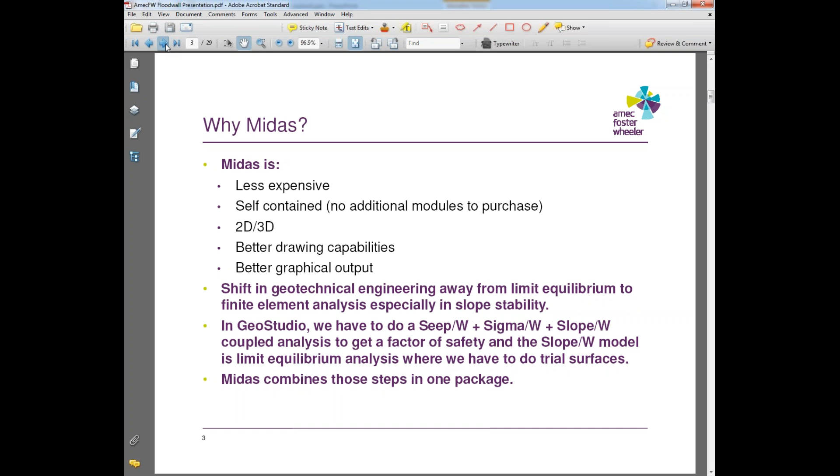This is doable, but it's kind of cumbersome. I just don't see that being the wave of the future when you can do all those steps in MIDAS in one package and in one analysis.

So like I said, we currently have 3 MIDAS network licenses. We are going to be steadily increasing the number of licenses. I'm not sure exactly how fast, the rate at which we increase will depend upon usage. When we have periods where we've got more people wanting to use the licenses than we have licenses, we'll buy some more.

The upshot of this is that at some point we're hoping to get into an enterprise licensing situation with MIDAS, similar to some of the enterprise licensing schemes that we have primarily with Bentley and with Autodesk. So in those situations, we don't actually buy the software, we're basically leasing it.

We use it on a daily basis. When you want a license, you open up the software, it goes out into the network, and if a license is available, you tag that license and start using the software. If a license is not available, it goes to a Bentley server, for example, pulls a license down and lets you seamlessly start using it. So we're hoping to get that way with a lot of other different software.

So that's kind of the background of why we're doing these MIDAS tutorials, these webinars, is that this is the direction that we want to go, and we're going to be steadily working on ways to get there.

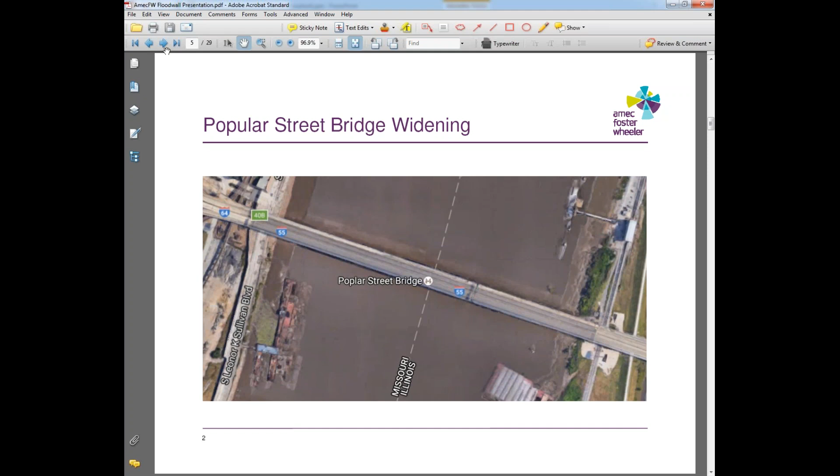But they're going to be moving to the south. They're going to cut out about 20 feet of this existing flood wall, and then they're going to be replacing it. It's hard to see in this particular photo, but right about there is a seam, and the angle of the flood wall changes as you move to the south. I'll show that in some drawings here in a little bit.

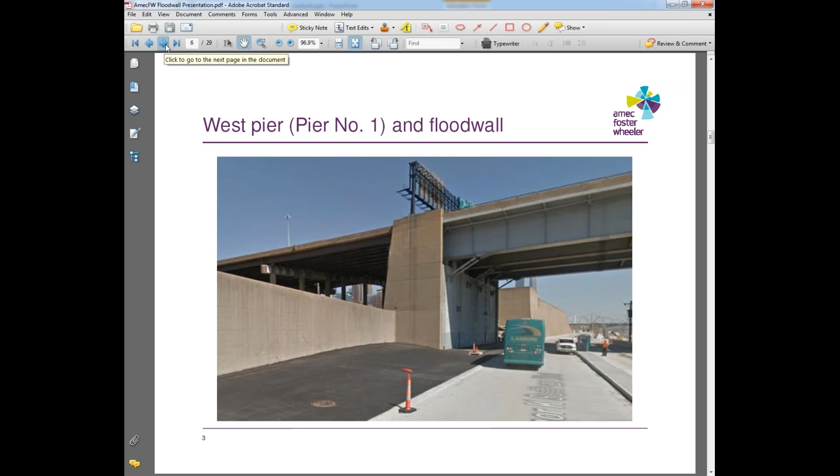Here's another picture of that same area. You can see the doors, and there's some windows there that are below flood stage, obviously. But again, they're going to take out this portion of the wall, recreate it, as they move to the south.

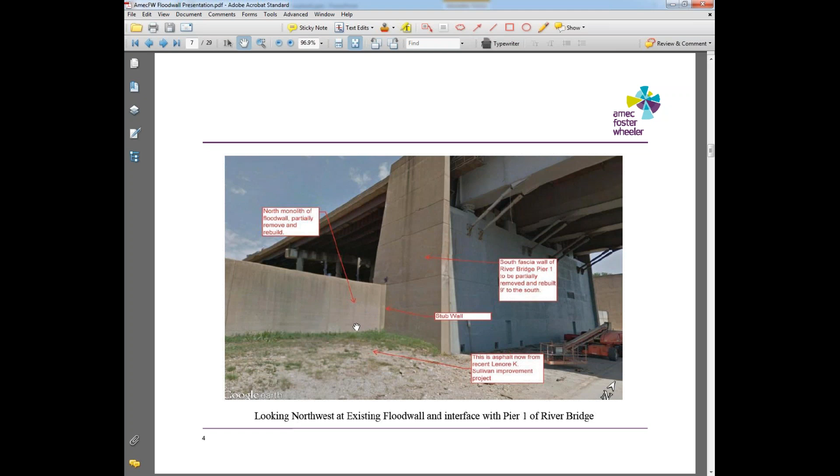Another close-up shot showing the joint between what's called the stub wall and the flood wall.

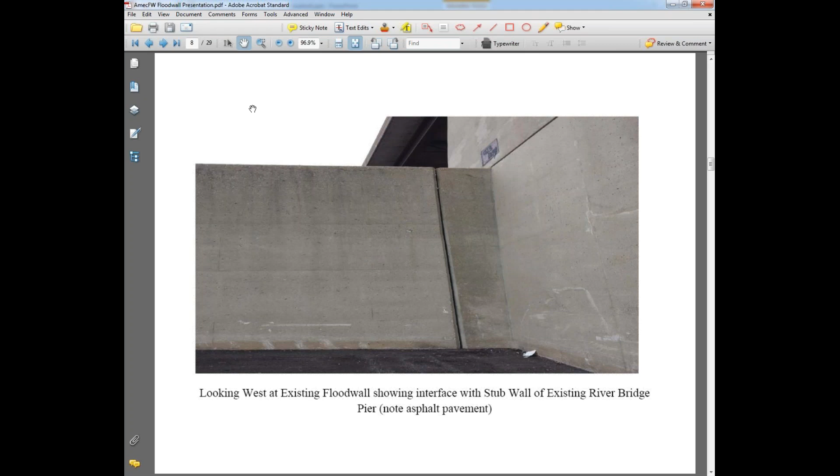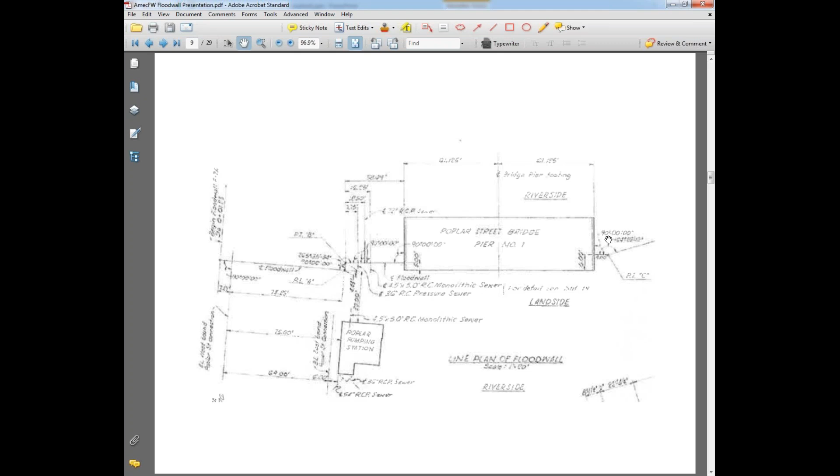Here is an old drawing that shows the layout of the pier and the flood wall. I'm looking at it standing on the back side, on the dry side, looking towards the river. So the river is to the top of the page, the land side is to the bottom. The area that we're interested in is on the right-hand side. The stub wall comes out, you can barely make these numbers out, but it comes out at 90 degrees. Then the angle changes, and the angle between the stub wall and the flood wall is about 64 degrees. So it goes off at an angle, part of the flood wall is perpendicular to the pier, and the other half goes off at a skew.

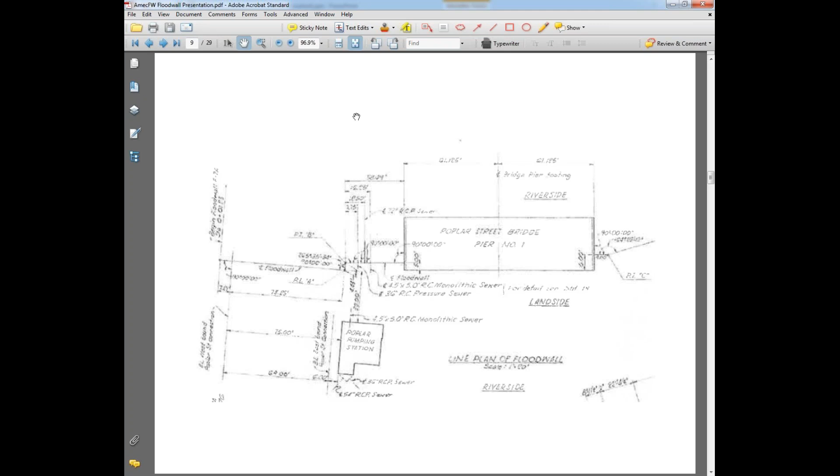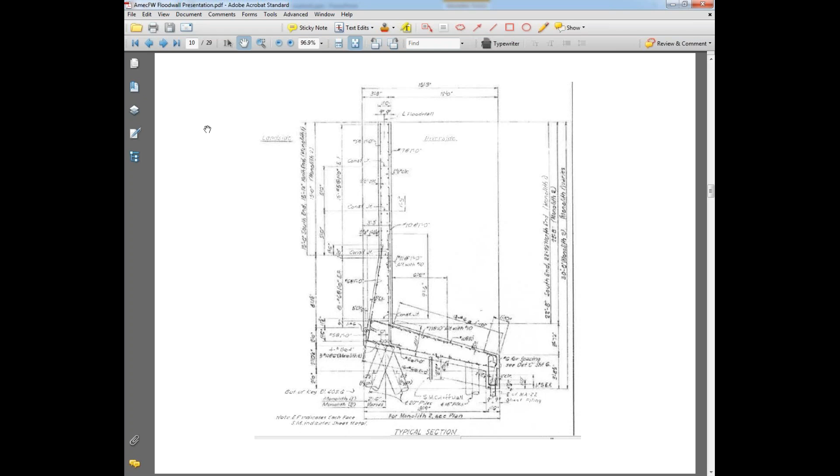Here is a picture, an old drawing of the base. You can see how on the left-hand side this is all perpendicular to the pier, and then once you come out a certain distance, then you start going off at a skew.

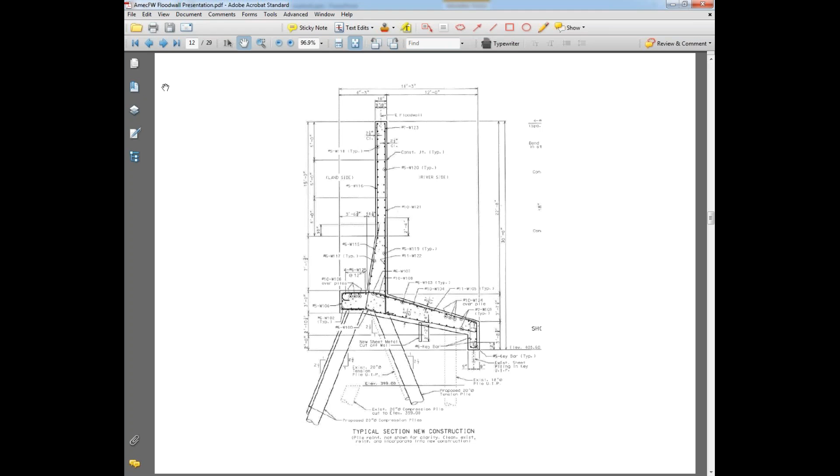Here's a detail of the proposed piles. They're going to put an 18-foot rock socket in. This is a 20-inch OD steel pipe that's drilled into a depth of 18 feet below top of rock and socketed into the ground. And then here's a compression pile that's being drilled 2.5 feet into the rock socket.

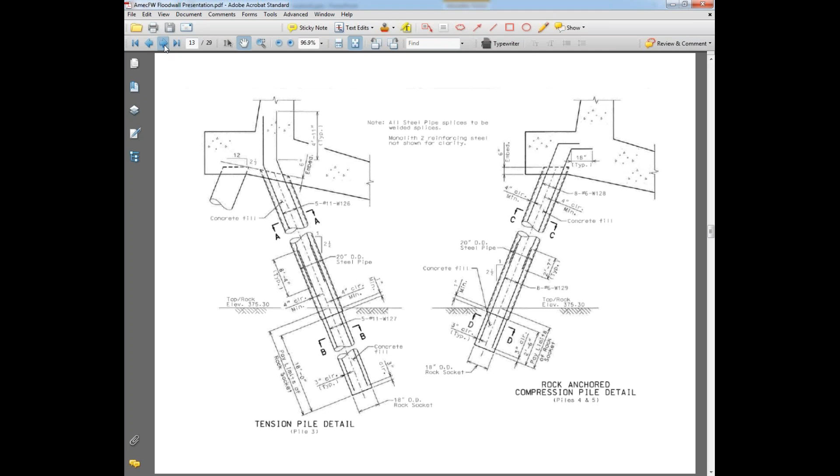So our job was to take the plans and specs and calcs and do a peer review. This is a flow net that the geotechnical consultant did for the bridge designer, doing a seepage analysis, trying to figure out what the uplift was for the wall.

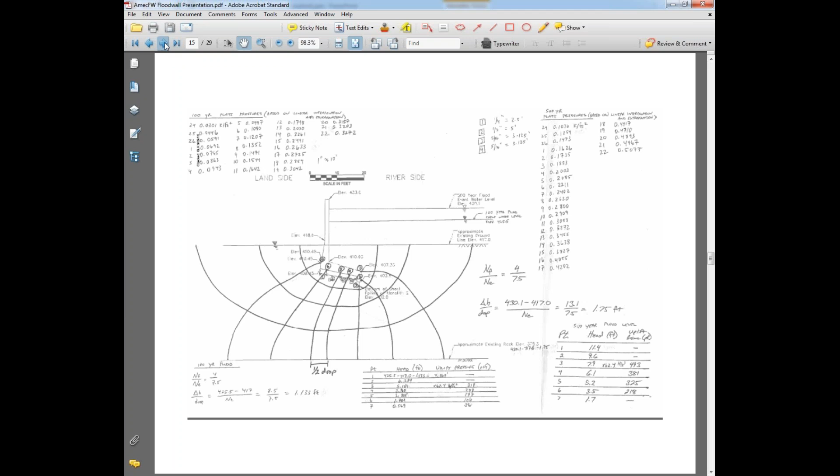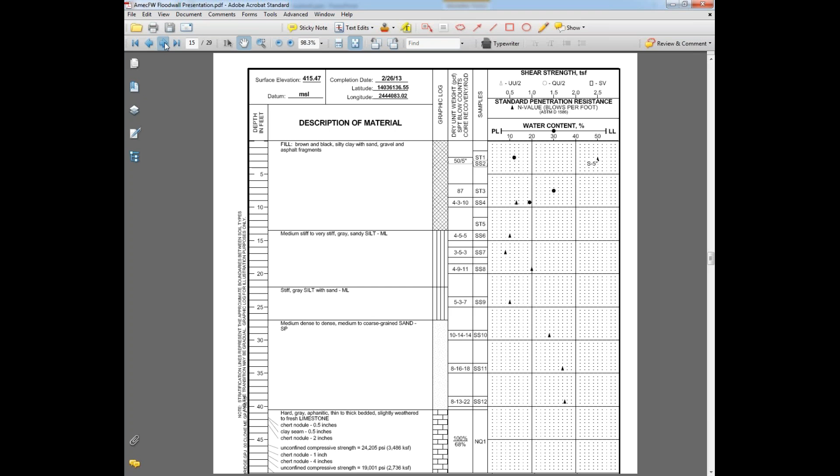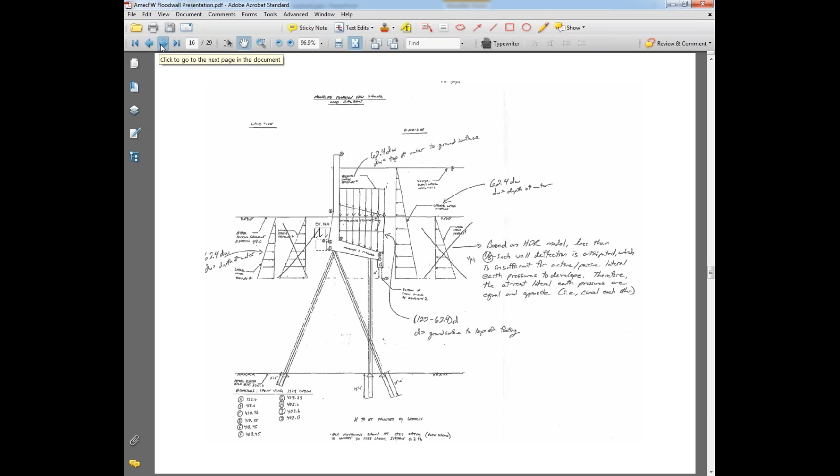So I pulled this out of the calc package that the bridge designer put together. You can see here where they're trying to figure out what the forces are on the flood wall. They've got some active pressures, they got at-rest pressures. They finally figured out that the at-rest pressures would be equal and opposite, so they didn't worry about them so much in the analysis.

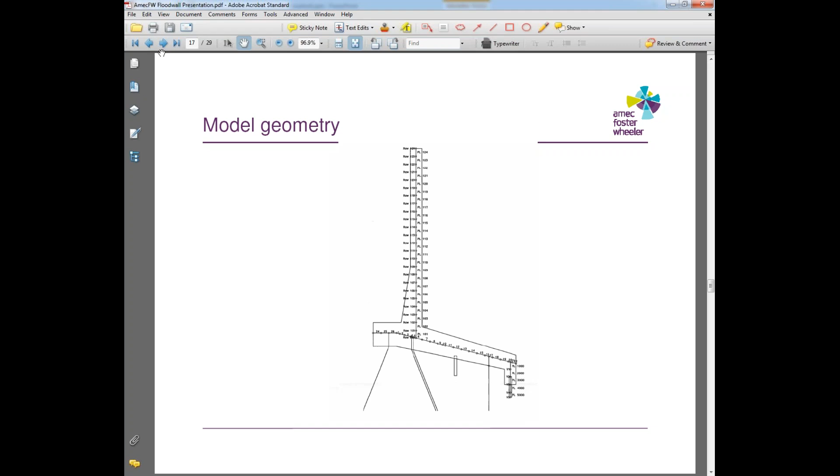So they put together a finite element model to try to figure out what the forces on the stem and the base were. Here is the nodes that they used in one cross section for their model. Here are the nodes that they put together for the base of the flood wall, showing the layout of the piles, both the existing piles and the new piles.

And then they put together an Excel spreadsheet to try to map those loads onto those individual nodes. So there are 67 pages of spreadsheets, printouts that look just like this in their calc package. Really difficult to make sense out of this given the way that it was put together.

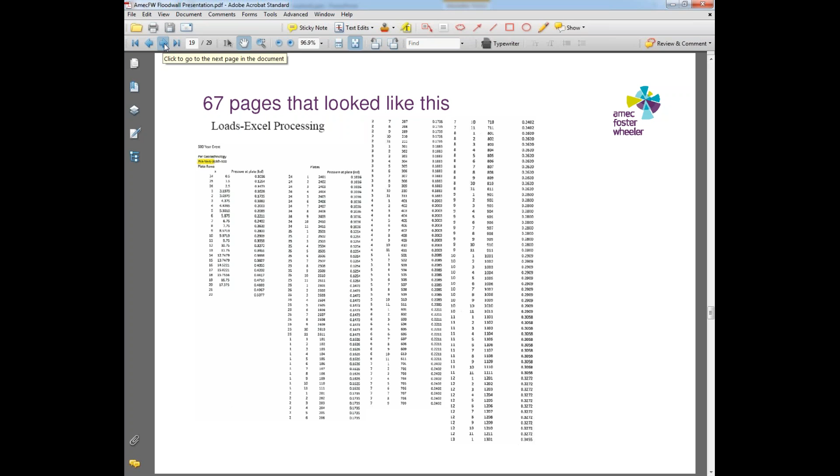And I'm not saying this to criticize, because this is the way a lot of finite element problems are done nowadays with various software packages.

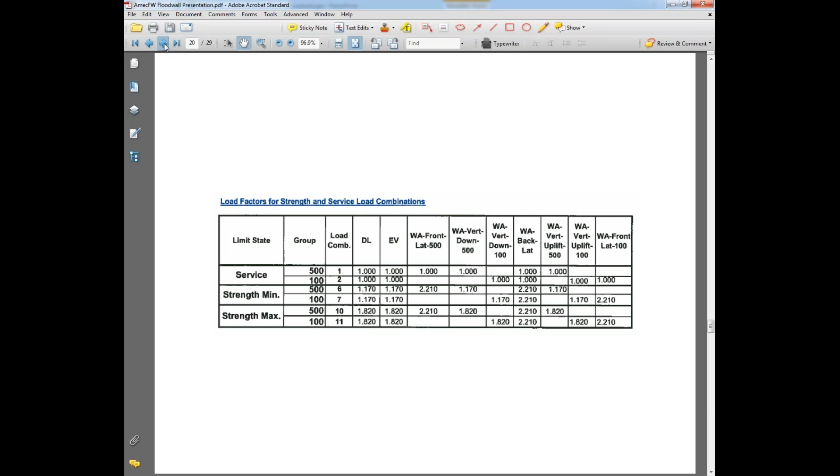So after doing all that, they put together some load cases. They had a 500-year flood, a 100-year flood. They used service loads and factored loads to come up with their design cases.

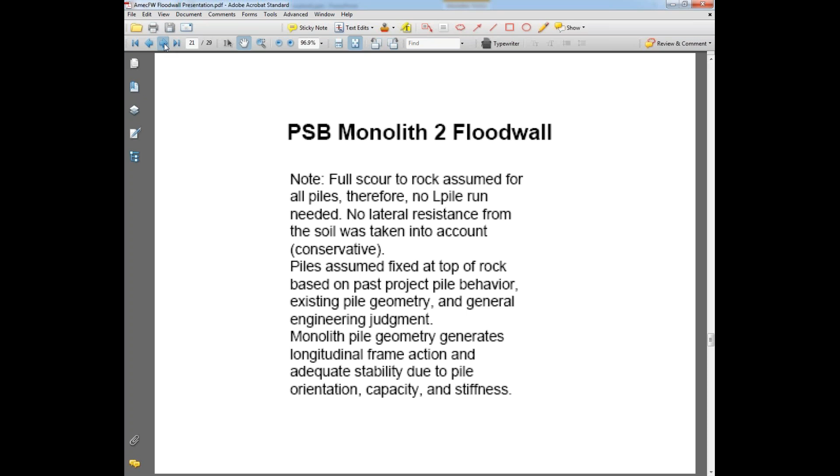And then they made this really important assumption. The assumption the designer made is that we're going to ignore the soil, assume that the soil's not there, and treat the piles just like they're a structural frame for a steel building. We're going to assume that they're fixed in the ground. We've got a tension side and a compression side. We think this is a conservative analysis, because if the soil was there, then we would have lower bending moments in the piles. So that was the assumption that they made.

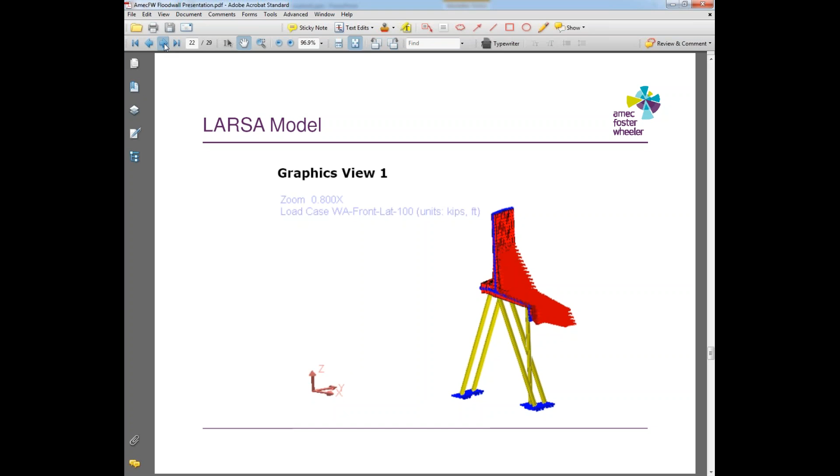So they took a bridge software structural package called LARSA. Amec actually owns this, we have a copy of LARSA in our bridge office in Denver, and it's a great software package for bridge engineering. Here's the model they created. So they built a model, and then they used the spreadsheet to go in and place pressures at individual nodes.

And they ran the result, and they printed out 115 pages of output that looked like this, which, as you can imagine, is really, really difficult to make sense of.

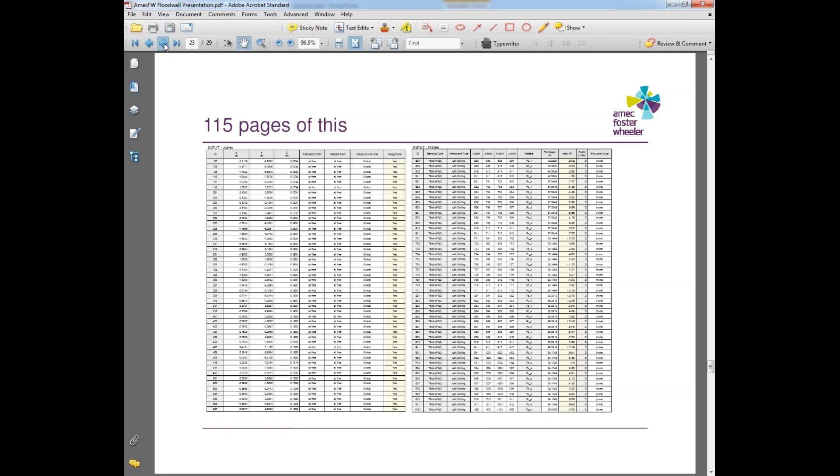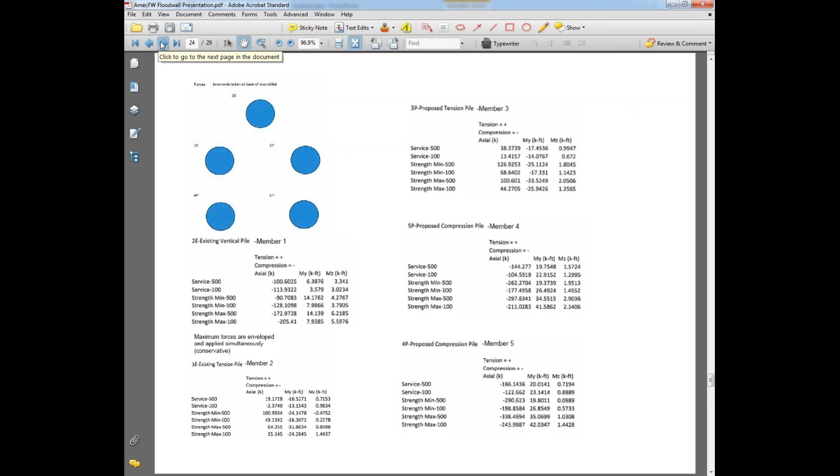So I'm looking at all this stuff, and I'm trying to figure out, is 42 kip feet reasonable for this analysis? And I had my doubts. Those seemed like they were kind of low to me. But how do I go back in and determine if they're low, or if they're high, or if they're reasonable? Just based on my experience, they look kind of low.

So here is the model of the wall that we actually have. I made a model of this in AutoCAD, and then I put it in 3D PDF, and it's going to pull up here in a second, hopefully.

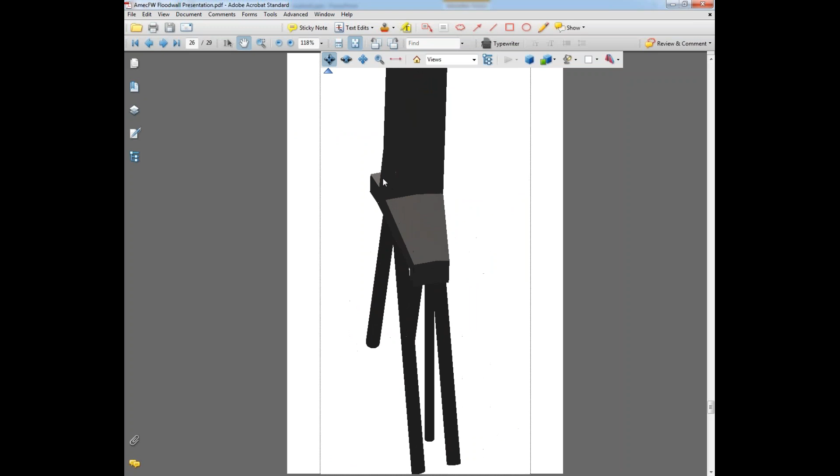So here is the model that I put together that shows the actual geometry of the wall. You can print these things, and the cool thing is that MIDAS, you're able to print these 3D PDFs that you can rotate and see what's going on.

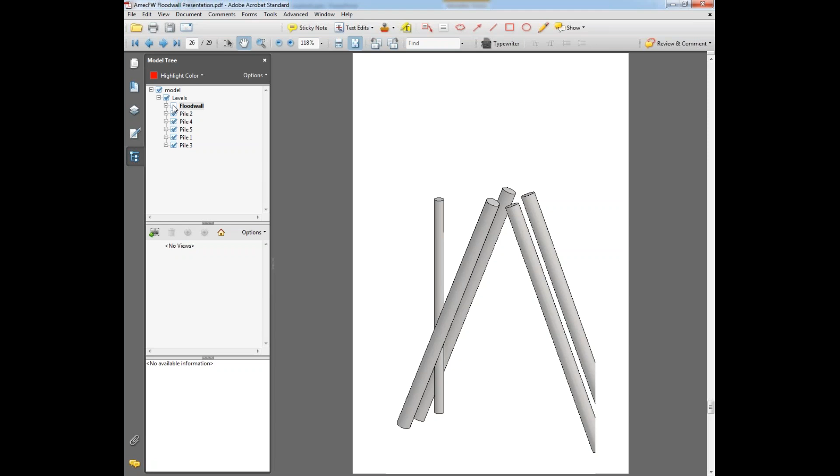The other cool thing about these is that when you create them in a CAD package, you can create layers, as most of you know, and you can turn these on and off. So I can turn off the flood wall, I can turn off any particular pile, I can put them back on. So you can really see what's going on.

So this is the model of the wall that's proposed. I couldn't create that in any of the software that we had, so I looked at doing this in Group.

Group is a finite difference program that uses PY curves to come up with the bending moments and the actual capacity of a pile.

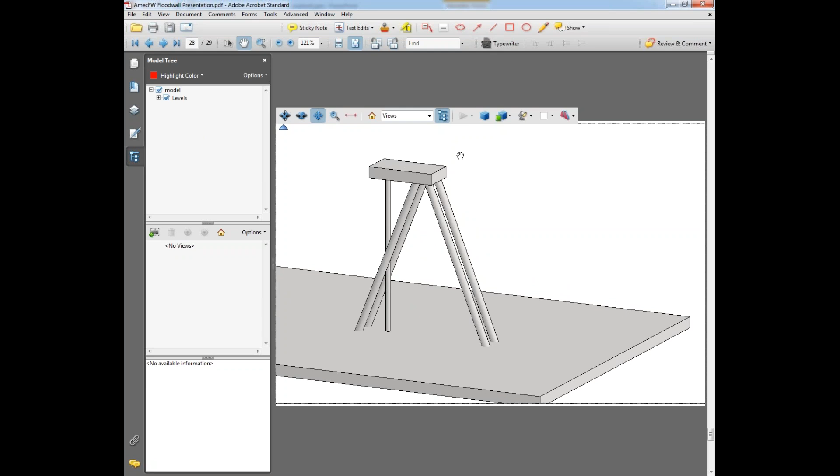Pull this up. So this was the best I was able to do in Group, was come up with something that looked like this. So I modeled this in Group. Turn the base off here.

So I modeled this in Group, and I came up with loads that were higher than what the Larsa came up with. So the loads that I came up in group were on the order of, instead of being 40 kip feet, were on the order of 60 to 80 kip feet.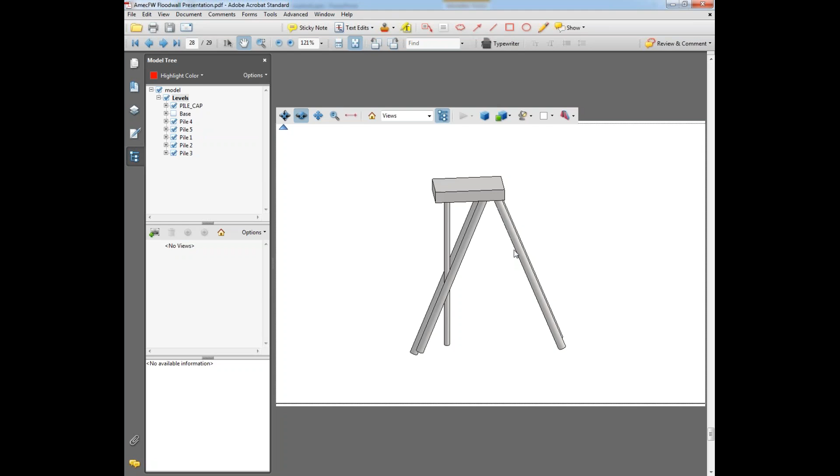So that's when we, and I did this just to show the difference between what we can do in Larsa, what we can do in group, and then what we can do in doing a MIDAS analysis.

All right, so that's pretty much the end of my presentation. I think I got one more slide. Yeah, so here's a picture of how group processes that data.

All right, so let me turn this over. I guess I do change presenter, right?

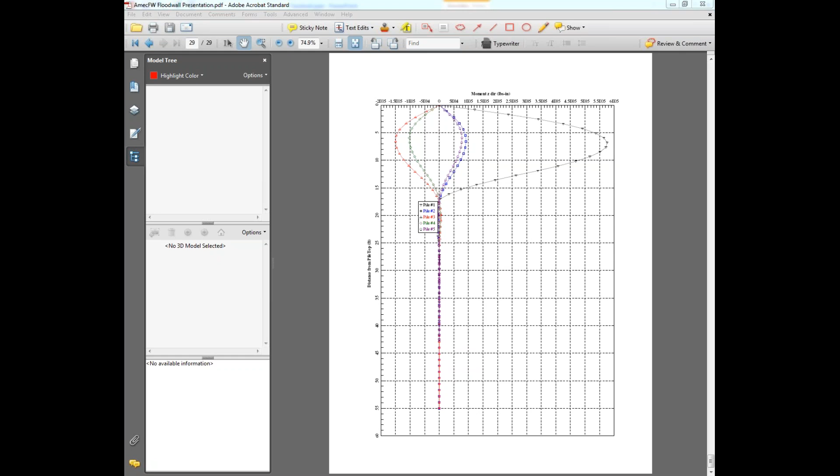I don't really see any yet. We'll give it a minute or two just in case there's people who are typing it in. I'm sure there aren't any questions because I did such a good job of explaining that. That might be a reason why also there's, they want to know more.

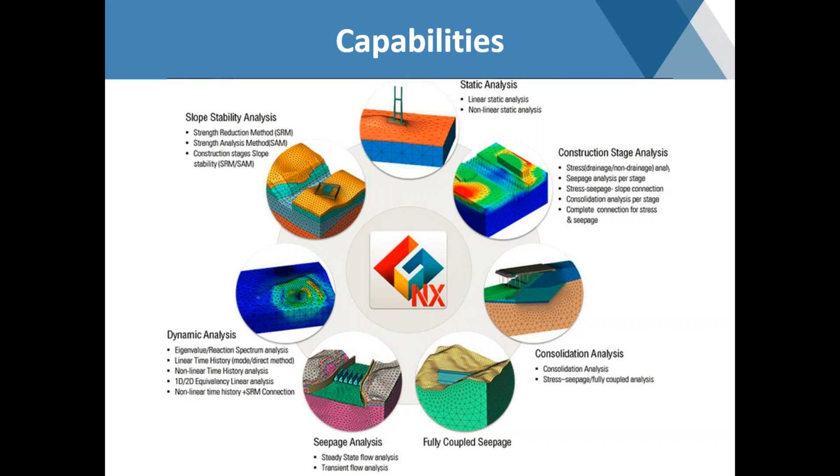The dynamic abilities were actually some of the questions that we're getting, and we'll show some of that, but we can do all kinds of seismic analysis as well as moving load analysis. And lastly, the seepage, where we can do steady state or transient.

So let's go ahead and get back to the original question, or the case study we're doing for the 3D flood wall. GTS NX, one of the biggest advantages it has, is the compatibility with all the AutoCAD programs, how easy it is to import these files.

So Don sent me his AutoCAD file of the flood wall. He gave me a little bit of the background of what he was trying to study, the results, primarily structural, that he was concerned about. So from that, I was able to simply import the lines from this AutoCAD file, and do a few AutoCAD commands like create faces on some of these and then extrude them to make solids, to finally have the mesh. Here is isolating just the wall and the piles.

And here's the ground. Now these are not according to the actual project. We messed a little bit with the geometry and distribution just to show you that in a 3D case, you wouldn't necessarily look at a straight horizontal wall. You might actually be interested in some of these uneven distributions. So we gave it a bit of a bulge, and a little bit further we'll show other terrains that we were able to analyze.

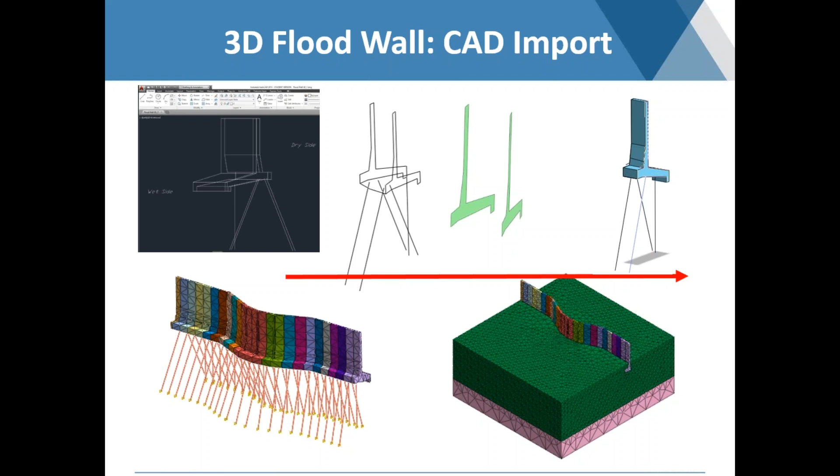Just keep in mind that the water would be on this side. We actually did a construction stage analysis. We varied the water level, as Don was mentioning. They cared about the 100-year, 500-year floods. So we actually increased the water level, and we can see how this pore pressure affects or redistributes the moments in the piles.

So here are some of the quick results that we can see for the ground itself. If we're going through these semi-coupled analyses, you can first obtain your pore pressures in one stage, and then subsequently see some of the stresses or displacements directly on this stress stage, as we call it. So we're looking at the nodal head.

As I mentioned, the water's on the right side. We see here the pore pressure, and we see some of the displacements on the wall itself based on this pressure. And we see here the water level as it's seeping through the wall or under the wall to the left, and we see two different colors to show the different final stages of the water through the stages that we went through.

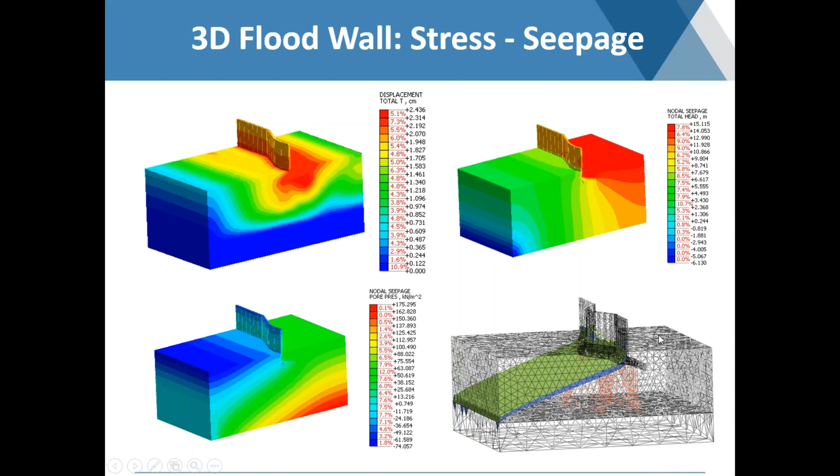So we actually increased it by a few feet, and this is kind of reflected here as it's seeping through the left. More importantly, however, as Don had mentioned, is the structural results on the wall itself and the piles.

So the program allows you to have stresses, moments, forces directly on 3D surfaces. 3D elements don't necessarily always show these, but GTS NX has an additional kind of element to extract results like this. So we can apply this to the surface of our wall and get the moments, get the forces directly distributed over this. And as we would expect, the bulge is going to have a higher concentration.

But more importantly, looking at the piles, we see here we have our axial forces, our shear forces. But as Don was emphasizing the moments, we're looking at a moment of around 140 kip-feet. So going through the transition, the original estimate was around 40, which is a vast underestimation. We're looking closer to almost 3 to 4 times higher in our final model.

And this gives you the advantage of actually being able to see the distribution. So I'll actually bring in the model itself.

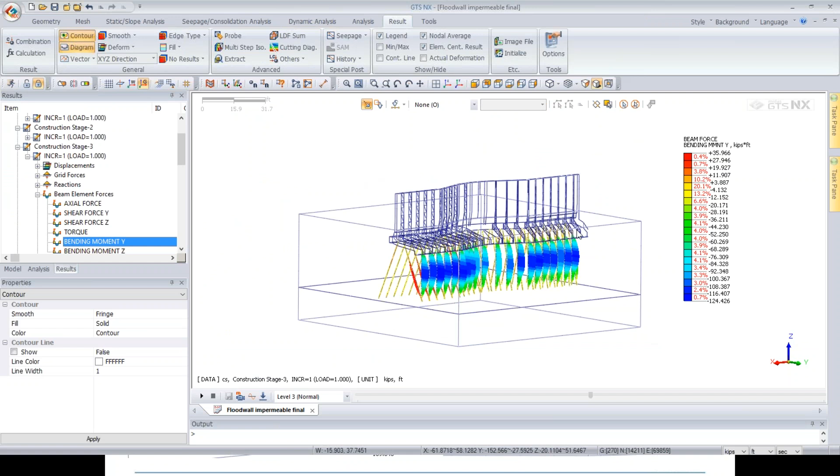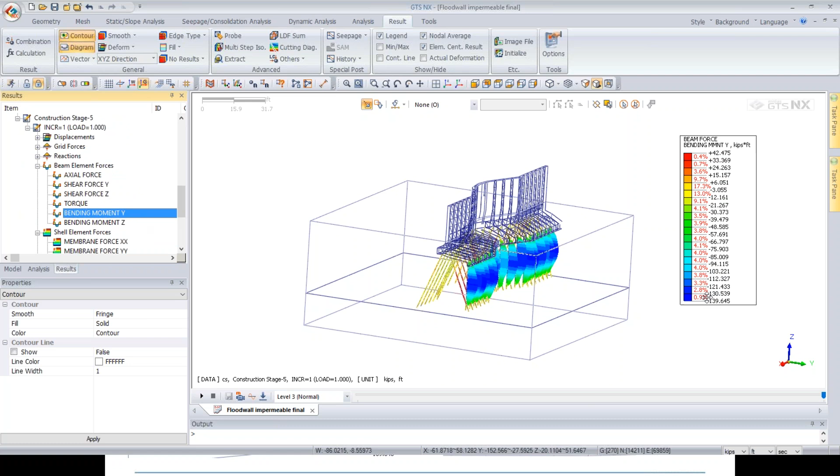So what we can see here is also looking at the moments. We see this distribution, and we're looking at 120 kip-feet for one of the stages, where the water level might be at a certain height. Further on, we have additional construction stages. If I go to the final stage, after updating my pore pressure to a higher level, we see that it actually increases. So the program does allow you to easily go through these manipulations and definitions of stages in a very easy manner between kinds of analysis.

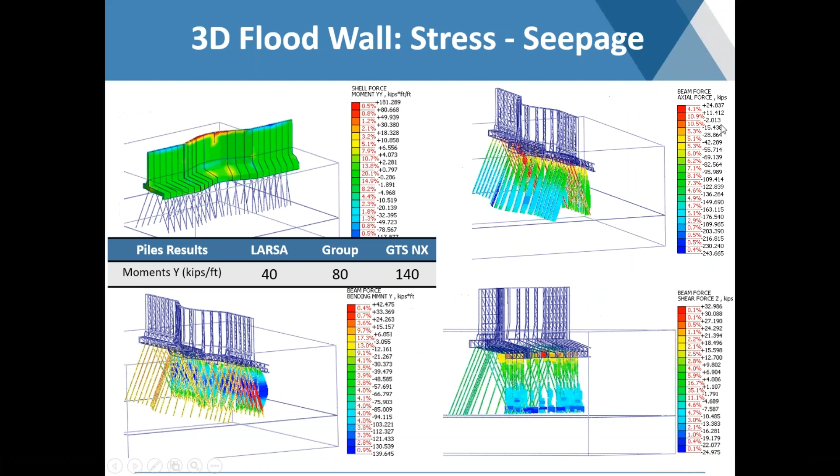In this case, as I mentioned, this is a semi-coupled seepage stress analysis. We can also make it a slope stability analysis if we had a different kind of soil or distribution of the geometry, like we see here.

In this case, we additionally added some other kinds of elements, shell elements on the wall, and varied the terrain. What we want to emphasize is that in a lot of these geotech programs, if you're interested in an interaction with some other existing structure, you usually model, say, a bridge pier as a point load or pressure load. So the structural engineers give you what they're obtaining as their pressures. This geotech engineer puts it as a load, gets his results, and then sends back information to the structural engineer about the stiffness, the K values.

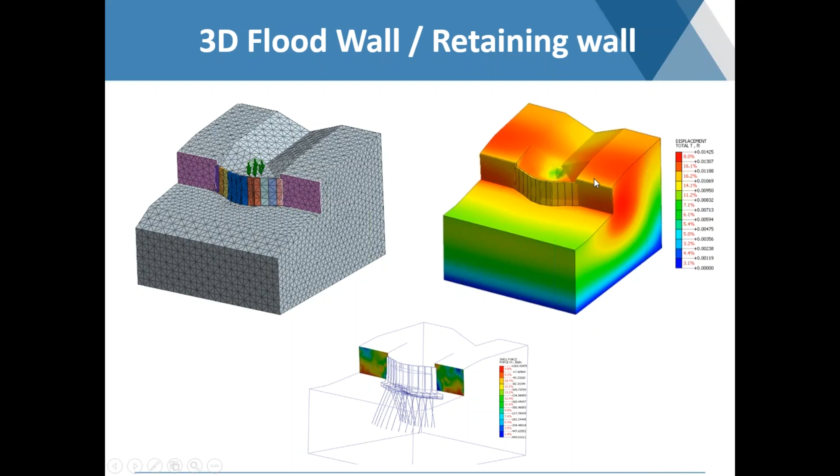If they're lucky, the structural engineers can model the foundation of the structure within the same program, but they have to model it as soil springs. So this is a current method for a lot of software.

What we want to show you is how we can take this a bit further, and this is actually unique to MIDAS. We not only have a geotech software, but we carry the full line of civil engineering software. We have a bridge software called MIDAS Civil and a building software called MIDAS Gen, and these actually communicate. We can import the full structure into our geotech software with the properties and loads, and model the ground and structure in a single file and run it together.

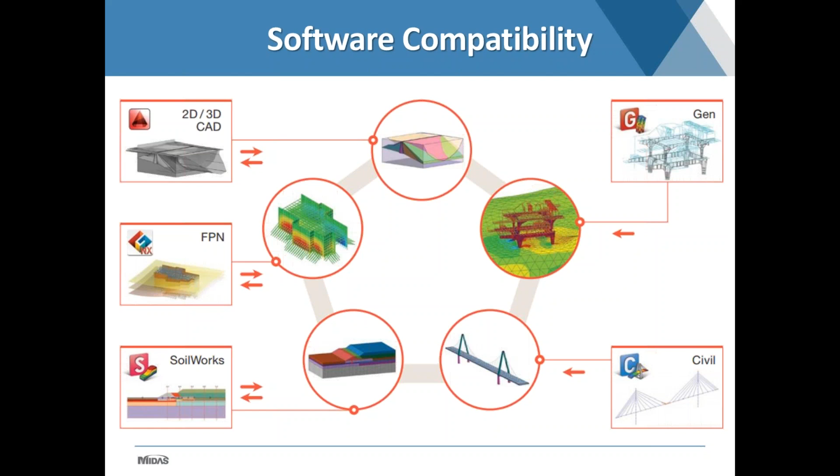So let's take a quick look at what that could look like for some of the structural engineers that might be present, or within some of the Amec offices or clients.

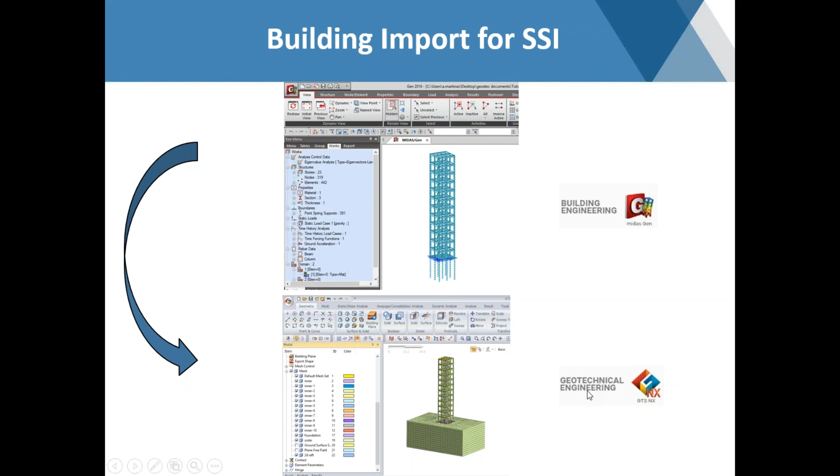So if we have a building, this is our MIDAS Gen, and this is the building with the ground imported for the geotech in GTS NX. What we like to do in this case is a seismic analysis, a soil-structure interaction comparison. Luckily, Gen is a pretty advanced tool in itself, and you can model the ground as soil springs, applying these boundary conditions directly to the foundation and to your piles.

We'd like to see how, under the same seismic load, in this case for both you can just copy paste your own table from Excel, what the results would look like and what the differences would be between the methods. So in this case, we import the structure, we model the ground. GTS NX allows you to have free field boundary conditions, so that there's no concern about the wave bouncing around in the underground and your results being overestimated. We have advanced boundary conditions for these kind of seismic analyses.

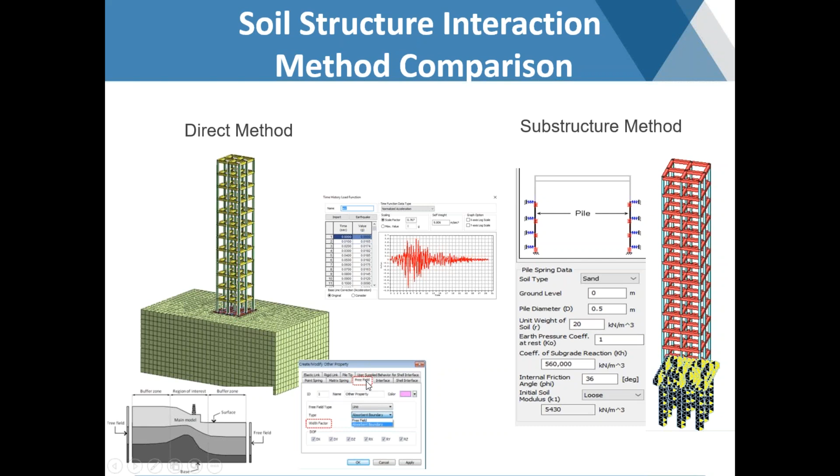So if we take a look at the results, purely looking at the piles themselves, comparing the forces and moments between our structural software with soil springs and our geotech software with the ground modeled as 3D elements, for the seismic load we see that the structural software with its soil springs has limitations and underestimates by over 30% the forces and moments. That's significant, especially if we're looking at the foundation.

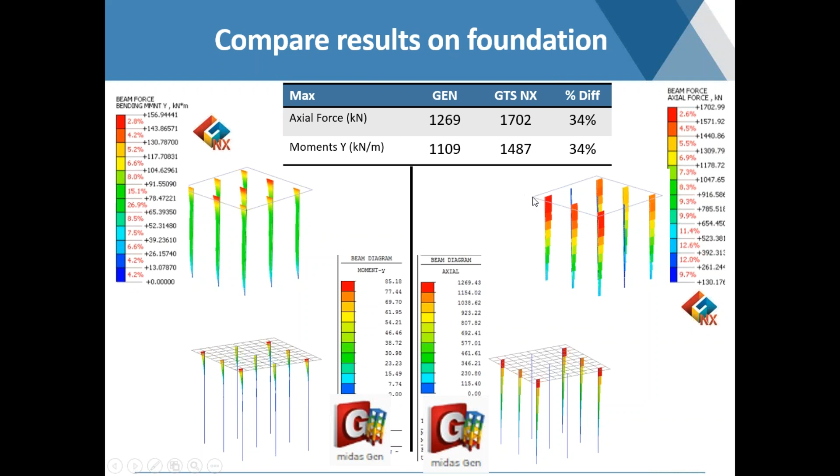If we were to look at the whole structure, which is also of interest, some of the other major displacements or axial forces are not that off. But if we look specifically at the moments, they are redistributed, and there is again an underestimation. So for seismic analyses, and we'll see other cases in a little bit, it's actually a significant underestimation.

So we're looking here at our structural software, just to give you a preview. It's a similar interface of commands based on icons, and again we can do all kinds of construction stage analysis or seismic analysis, with different kinds of load distribution within the structural software.

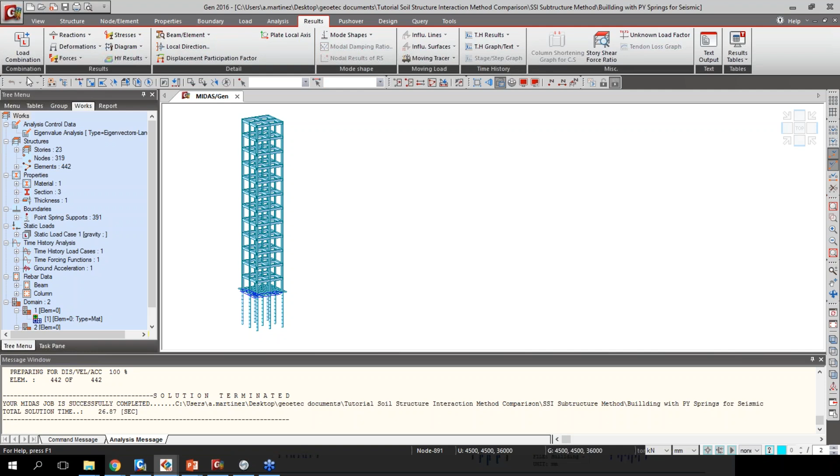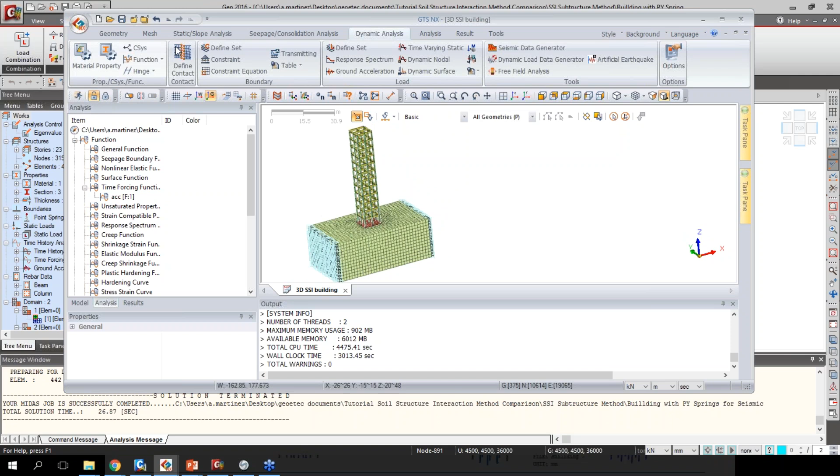But for the geotech, Amec being the main focus, what you would really like to do is take it to a closer approximation of what's happening, with nonlinear conditions and nonlinear properties of the soil itself. GTS NX also has very advanced constitutive models for these kinds of seismic analyses, including liquefaction. So you would be able to model a softer soil beyond what a nonlinear or linear spring would be able to model in any structural software. These advanced numerical theories allow you to model the ground's nonlinear properties in a much more realistic and advanced way, but with the structure in place.

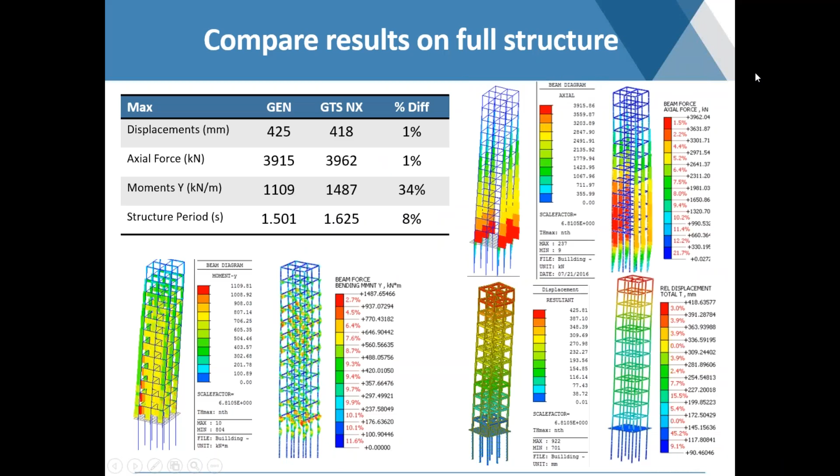Moving on to another case, this would be for the interaction with our bridge software. This is a bridge from our MIDAS Civil, similar to Larsa, but from what I hear, with much better reviews as well. It has a similar interface to what we saw for the Gen, with icon-based commands.

We're looking at some of the results for displacements under the load. In this case, we haven't modeled the substructure - we just fixed the base, the tip of the piers, and the end of the bridges. So we see an uneven distribution along the longer segments of the bridge as far as the load affecting the displacement.

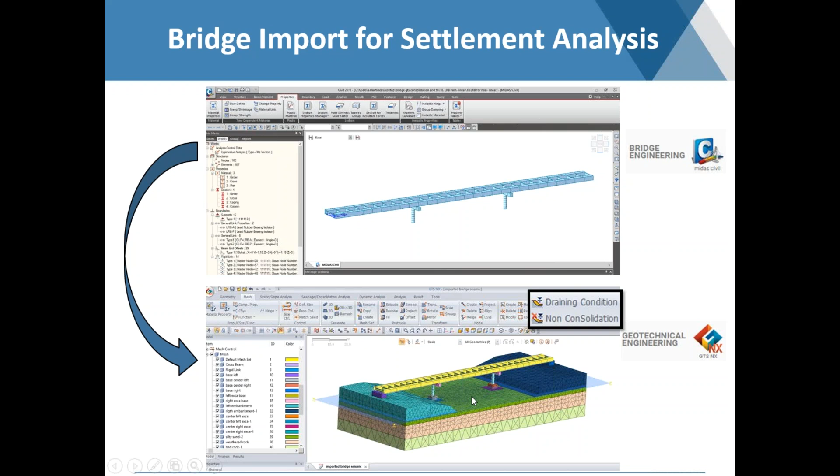But what if you really have soft soil in your problem? What if there's some drainage condition you have to consider? GTS NX would allow you to import the structure, model the foundation with the piles, and then apply advanced constitutive models for these soft clays with drainage conditions, as well as model the construction stages.

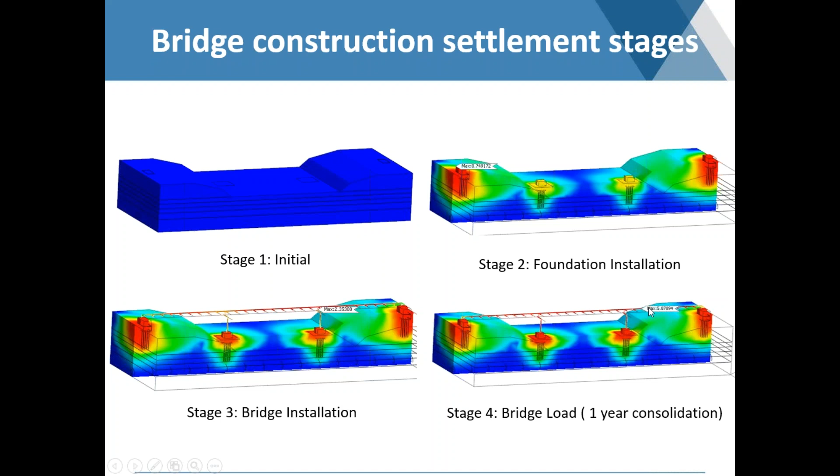So you would be able to see a settlement over time, not just immediately based on a static load. We're seeing here the construction process itself - installation of the foundations, the bridge itself - and then a long-term, maybe one year, short-term result, but you can make this as long as you want. We're looking at settlement over a one year period, getting closer to 6 centimeters. Originally, we were looking at a static fix closer to 3, and that was only based on the longer segments of the bridge. But here we're seeing a better approximation of what would actually be happening over the long term.

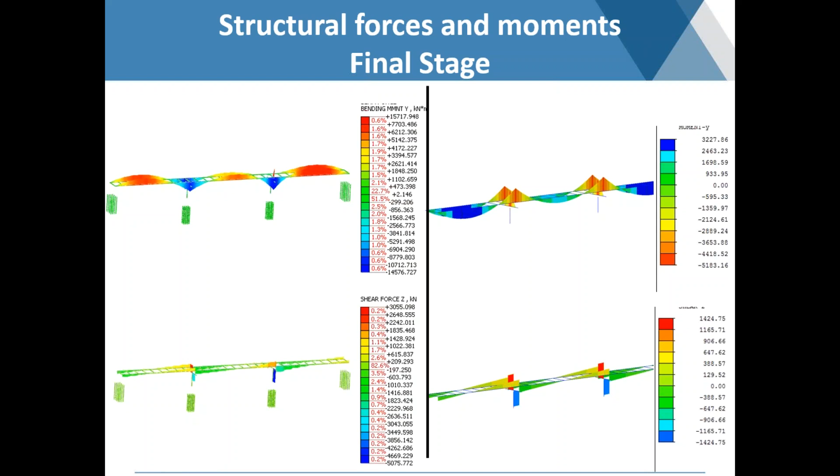And lastly, the shear forces - we're looking at much more than a third, close to 5 times underestimated. So when you start to consider how a bridge is going to settle, how these forces and moments are going to redistribute, it becomes really clear that fixing a base, which is still done by a lot of programs that lack the ability to do even soil springs, can be a big miscalculation.

And lastly, I'd like to show - there were some questions about what if there's a new or existing structure and a new project taking place, and we'd like to see how these effects are going to affect it. So consider the same bridge, the same model, but now we're actually going to dig a tunnel going under it. We're located in Manhattan, and it will be very similar to something happening like with the Queensboro Bridge.

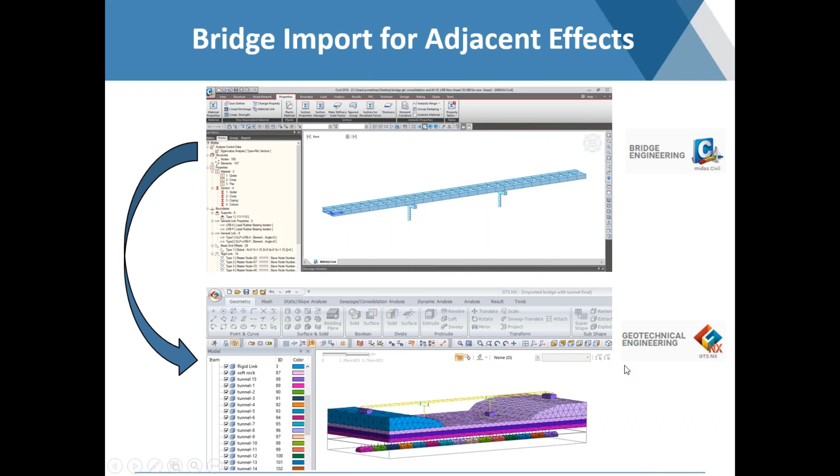There's an existing bridge, and there's also a subway line that goes very close or directly under it over to Queens. So if this was to be the case for a new bridge or a new tunnel under a bridge around the city, this would be the kind of analysis where they'd be interested in seeing how this new excavation is going to affect the settlement of this existing structure.

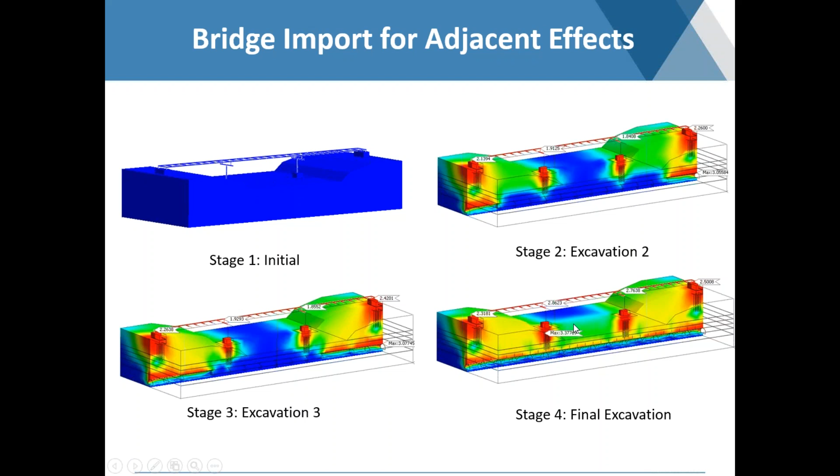So we're seeing here now the structure itself - we're clearing the displacements because we're only interested in seeing how the new excavation is affecting it. As we're progressing with the excavation, we actually start to see a few centimeters of settlement. It might not be significant, but depending on some of the conditions, size of tunnels, this could become an issue, also with the redistribution of the actual forces and moments.

Some of these might look like the same distribution, but if you recall, the moments themselves actually look a little bit different and they're much higher now. So the shaking up, even if it's just a few centimeters at the foundation, is actually redistributing, maybe misaligning a little bit the bridge, and this can become a concern.

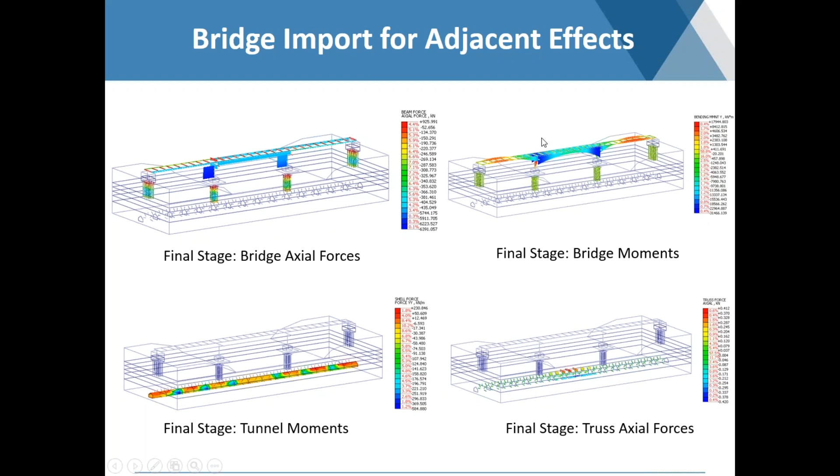So all these - we're also seeing here some of the forces on the tunnel itself and on the support elements for the tunnel. All these kinds of advanced analyses you can do all in the same model. This would actually be a pretty complicated case to go between different softwares, different offices. We can do it all in one.

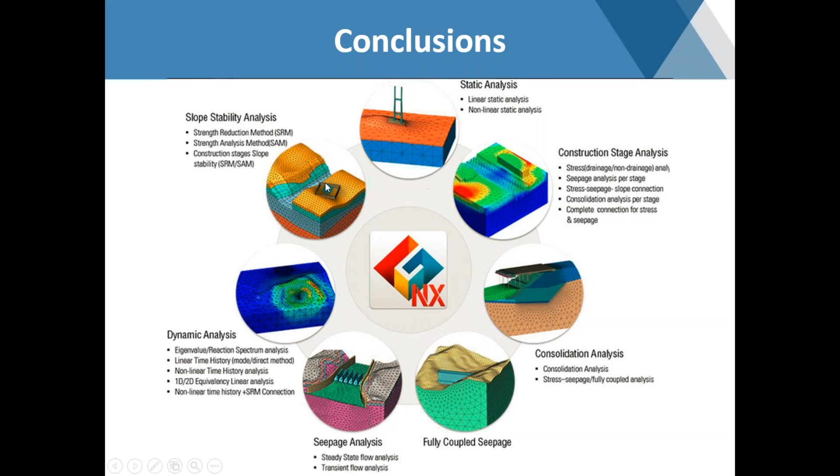So in conclusion, I'd just like to give you a quick recap of what we've been looking at. We looked at some of these capabilities, but the program can do anything in terrain-wise, geometry-wise, analysis-wise - anything that needs to be done for geotech.

Given the compatibility with AutoCAD files, this is probably the best software for capturing irregular geometries, especially in 3D. As we have shown in the previous sessions and we're looking at now, the program can do axisymmetric, 1D free field - one of the seismic capabilities - 2D and 3D, all on the same platform.

It's an all-in-one tool. As we saw, we can do all the analyses that you would need, including the direct method for soil-structure interaction, bringing in the structure. We saw that the substructure method might be sufficient, but once you have a comparison or calibration method, you can see that it actually underestimates the results, especially for nonlinear behavior like in an earthquake.

And so with GTS NX, you can actually have this full soil-structure interaction, importing directly from our building or bridge software, and it would allow you to get more accurate results.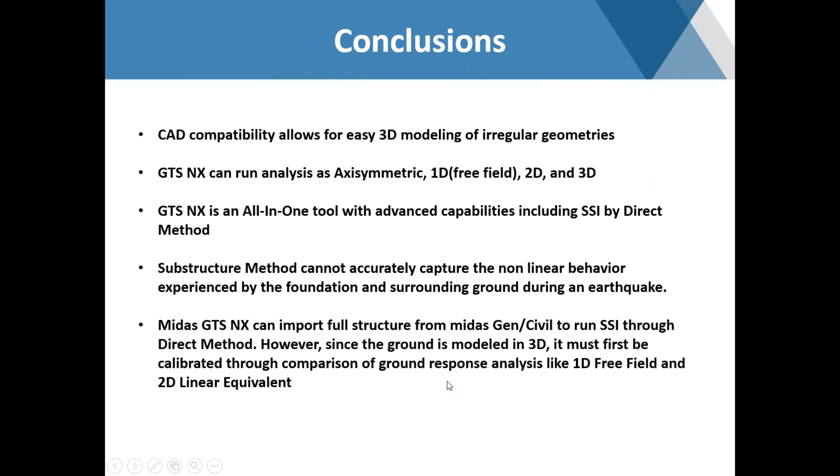Given that you're modeling the ground in 3D for seismic analysis, you would also need to first calibrate it, which can also be done internally by other methods within the program, like 1D free field and 2D linear equivalent, so that you can have this nonlinear behavior of the ground free field first, and then have the structure in place. But that would be the conclusion of our session.

When you're defining the material properties, you could actually choose some of these advanced soft soil constitutive models, but even the not so advanced nonlinear constitutive models have a tab for porosity where you can define conditions for the unsaturated or undrained soil properties, permeability coefficients, and such. It's also used a lot for some of these dam seepage analyses that require a careful definition of these conditions of the soil.

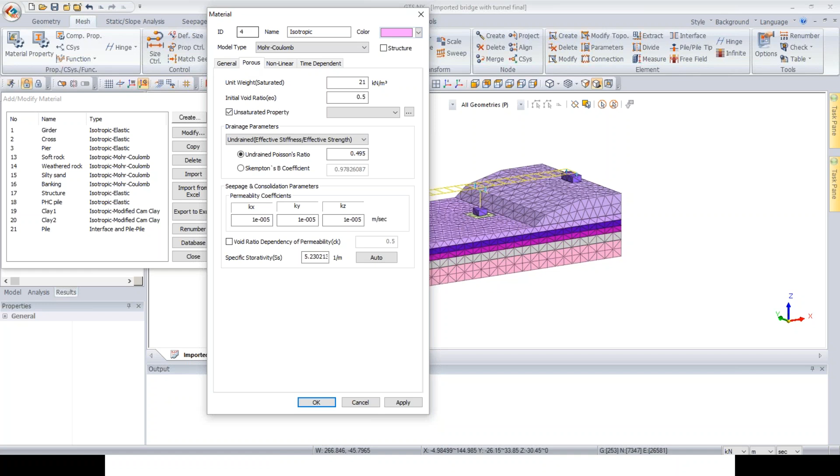While I have this model open, I wanted to show that this is the same model I did for the consolidation of the bridge as well as the excavation of the tunnel. I'll just show quickly how easy it was to define both of these construction stages, even though they're different kinds.

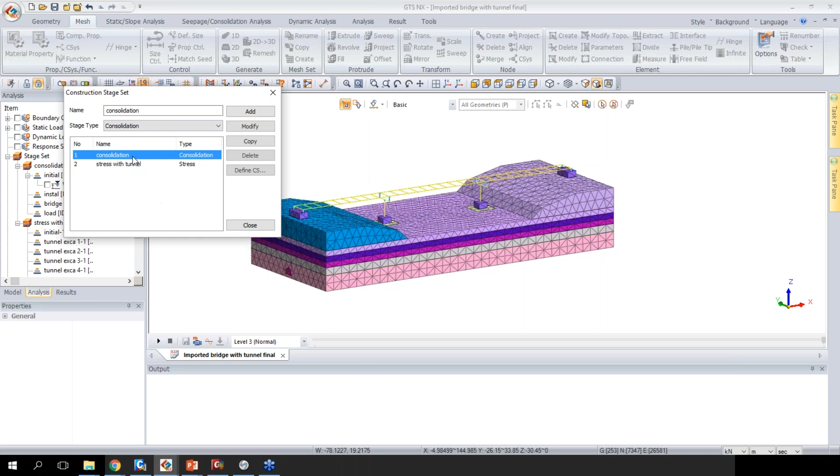So we can see in the program, in the works tree, we have two sets of construction stages. We see here the kinds of construction stage analysis you can do: stress, pure seepage, semi-coupled, fully coupled, consolidation, and the stress and seismic analysis. For the consolidation analysis, I was able to obtain these results.

As I had shown in the previous webinar, this is how we can define construction stage analysis, and we have a clear view of what's happening at each stage. It's easy to define them by dragging and dropping into the activate window, and defining a time step, like a duration for consolidation analysis. Here we're activating the foundations.

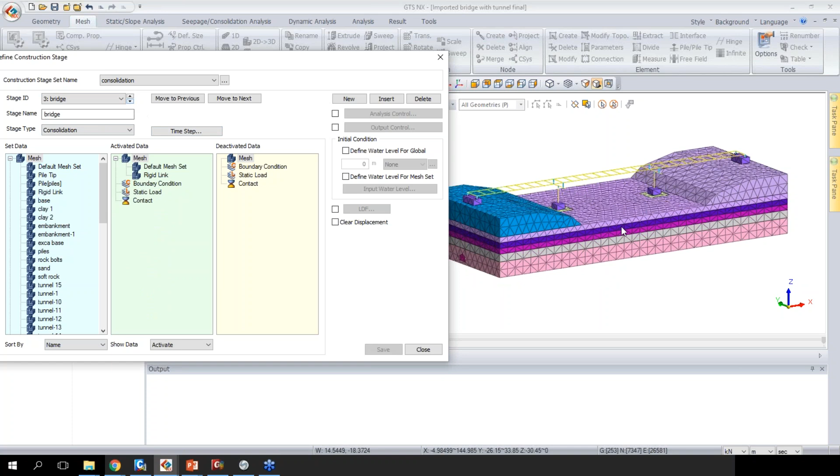If I go to the next stage, we're activating the bridge, and then the loads. This would be over a 1-year period. We define it here in seconds, but you would define it by days, which would make it more sensible.

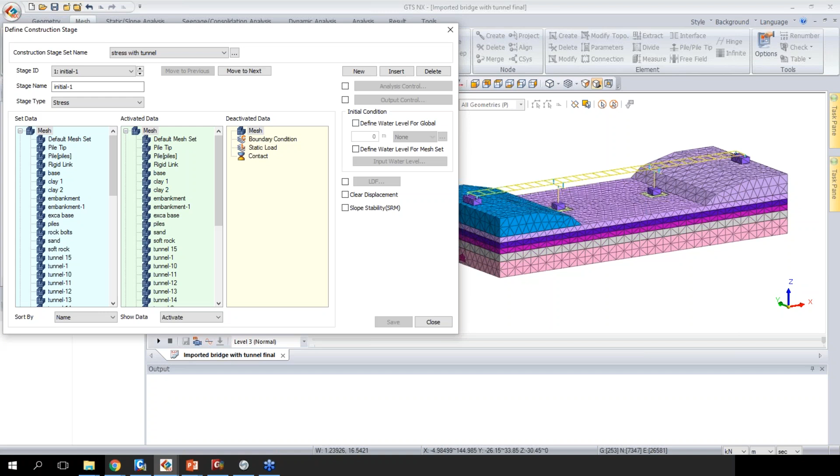Similarly for the tunnel excavation, we would have the initial stage be the bridge already in place, and then we start to excavate. We can start seeing here now that these sets are disappearing. So by dragging and dropping from our sets, we can start modeling excavation processes as well as activating different loads.

So just to give you an idea, by drag and dropping we can define, even within the same model, different kinds of analyses and group the results in a very easy to manage window in the works tree.

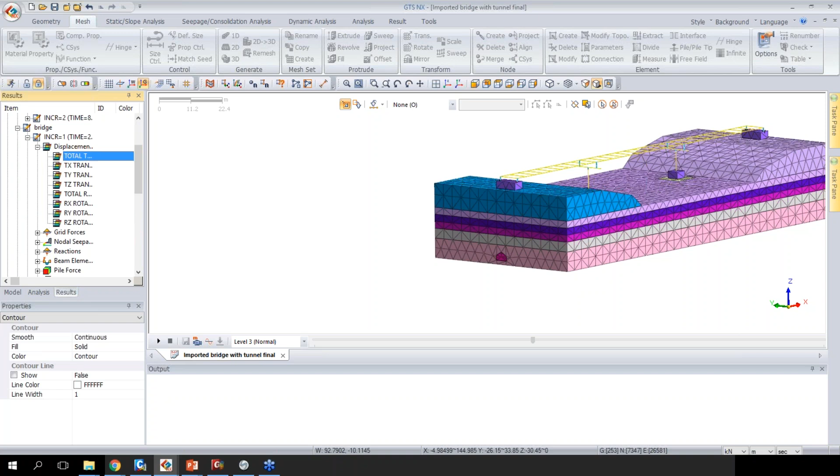So for instance, here looking just at displacements at different stages, I can navigate them with this bar at the bottom. I can actually make plane cuts and see how this is being affected over the whole process of the construction.

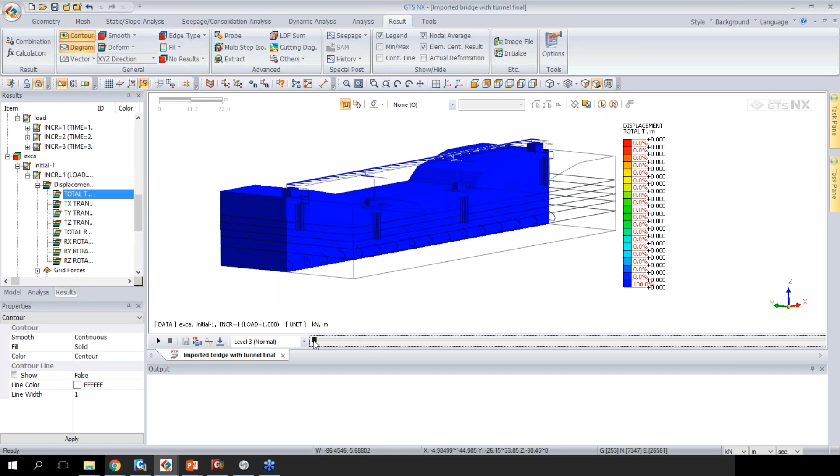And by the same token, I'll just show the same for what would be the tunnel model. We're seeing here as the excavation progresses, it's being excavated from both directions, a redistribution of displacements and forces.

There doesn't seem to be. Are there any other questions? We have a few minutes. We can provide answers. If people need to type them in, or as mentioned, we can directly answer you by email.

The other thing we're going to do is that the software is very powerful. It can do very complex models. There is a learning curve to be able to use the software effectively, so we're going to be continuing to put out tutorials. MIDAS has a lot of tutorials.

They recently switched over from GTS to NX. I think that was, what, 1.5 years ago, Francisco, something like that? Closer to, I think, almost 3 years now. Almost 3 years? Okay. So a lot of... 2 years, okay. So the interface is a little bit different, and some of the tutorials that they have from GTS days haven't been updated yet.

So we're going to be developing some more tutorials in-house that are going to start out very simple and build on the capabilities of the software as we continue to use it. We've made a commitment to MIDAS, and they've made a commitment to us. They're going to be one of our primary software partners moving forward, so we want to continue to develop our capability to use this software to its full power.